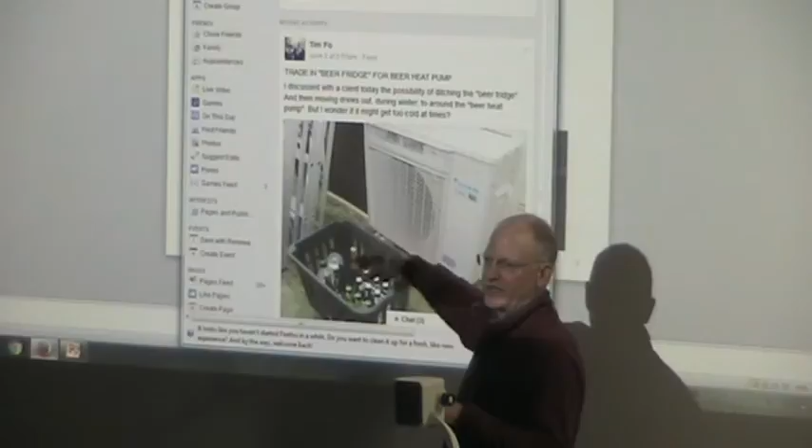Thanks folks for coming along on this cold night. When you get home this evening, how many will be heating their house with a heat pump? So there's a few. So a few of you know how it works already. But I do want to investigate if we think this is a good way for keeping the beer cold. I think it's going to work. If you've got a heat pump and you've been using it for heating, you walk outside, you'll feel the air coming out of this thing is frickin' freezing because that's how it works. It's sucking heat out of the air around it. And so the air that ends up coming out of here is very, very cold.

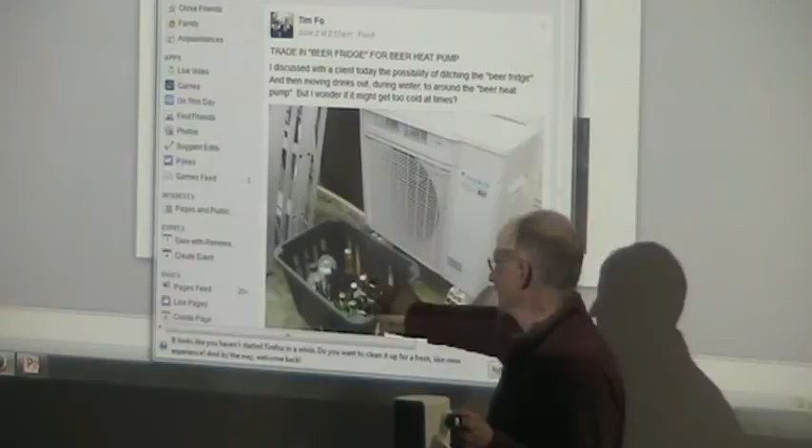So I do a lot of consultation with people in their homes about how they can save energy. And often you'll find people have a beer fridge, and so you encourage them to shut down the beer fridge. And in fact, here what we have here is a beer heat pump. So in the wintertime, you could go put your beer out there. But actually, it might even freeze if it gets cold enough. I think that's possible. As long as you got honest neighbours. And honest neighbours, that's right.

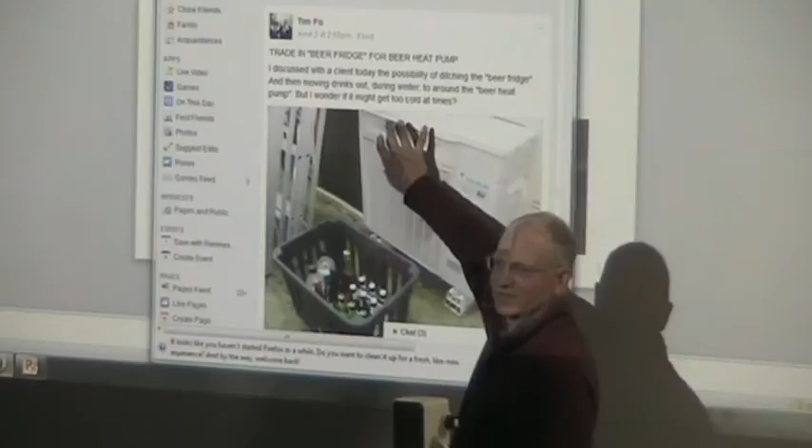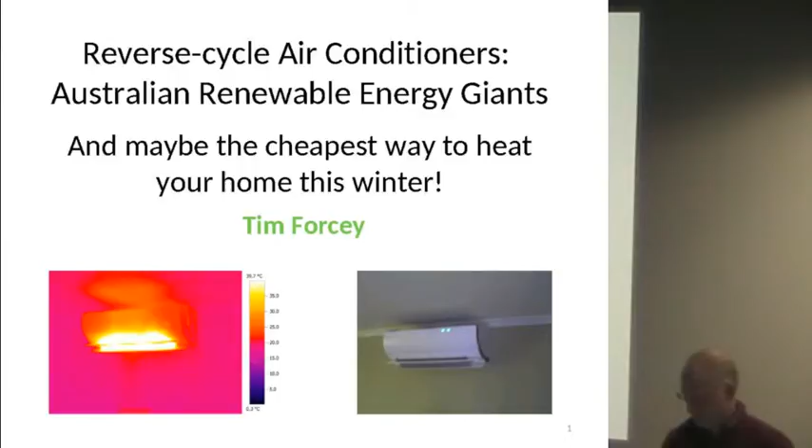All right, here's tonight's presentation. Reverse cycle air conditioners, Australian renewable energy giants. Actually, this presentation is already on the internet. BZE, Jody loaded it up with BZE Energy Freedom some time ago, most of it. And in fact, if you Google renewable energy giants, when I do that, the number one hit is this presentation. So that's pretty cool. So just go home and Google renewable energy giants and you should be able to find it.

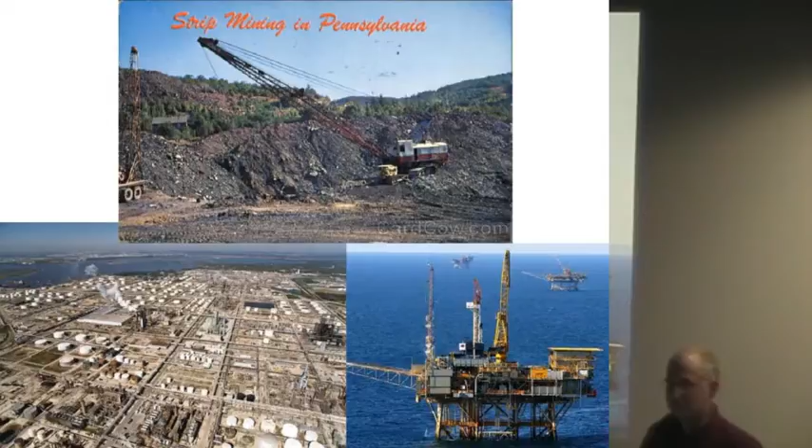A little bit about me. I grew up in the state of Pennsylvania in the States, and one of my first jobs off the dairy farm was working in the coal strip mines in Pennsylvania. So that's what I used to do. And then I trained as a chemical engineer, and I've worked with Esso and BHP. I've been offshore Bass Strait and worked in oil refineries and things, so that's the sort of thing I used to do. But then at some point I became a bit aware of the climate emergency.

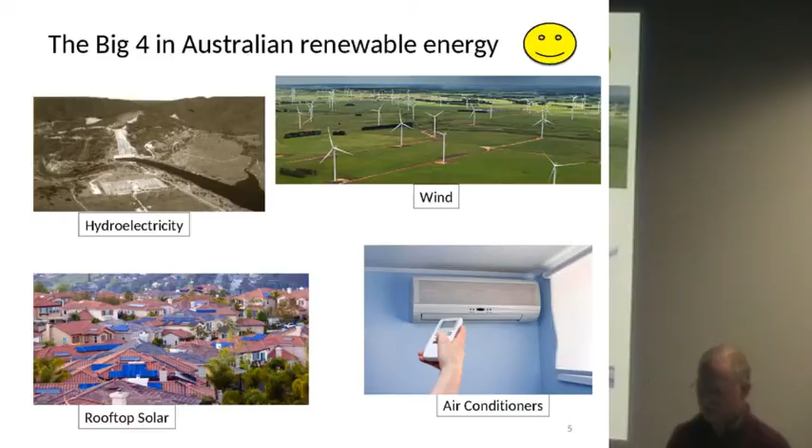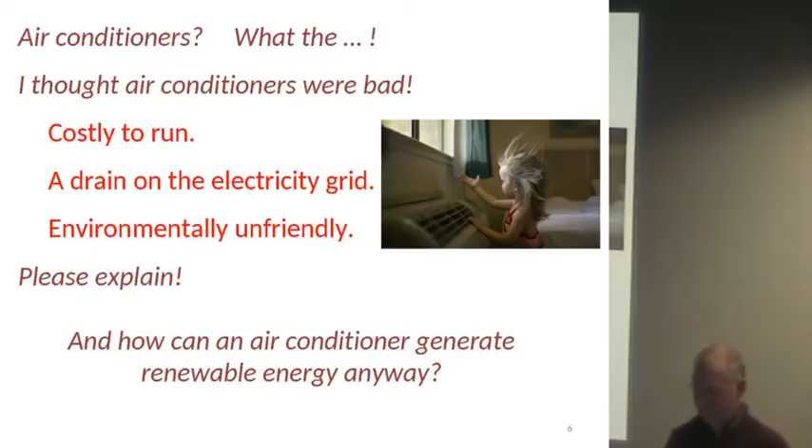Okay. Here are the big 4 in Australian renewable energy. Hydroelectricity, like the Snowy scheme, wind, rooftop solar, and air conditioners. Air conditioners? What the heck? I thought air conditioners were bad. They use electricity in the summer. They're expensive to run. They strain the electricity grid. They're environmentally unfriendly. Air conditioners are the devil. Please explain. And how does an air conditioner generate renewable energy anyway?

Well, all those nasty things about air conditioners are true in the summer, of course. So if you're running your air conditioner a lot in the summer because your house is not a very good thermal performer, then you can run up a big electricity bill. It does strain the electricity grid. It does do all those things when you're using it in the summer.

But in the wintertime mode, which is what we're here today to talk about because we're very close to the beginning of winter, when you run your air conditioner on reverse cycle mode, you might find they are the cheapest way to heat your house. You might find that it's far cheaper to use your reverse cycle air conditioner to heat your house than to use gas. So we're encouraging people to go home and find the heat button on their remote. A lot of people don't know they've got a heat button on their air conditioner's remote control. So go home and see if you can find that and turn it on and see what happens.

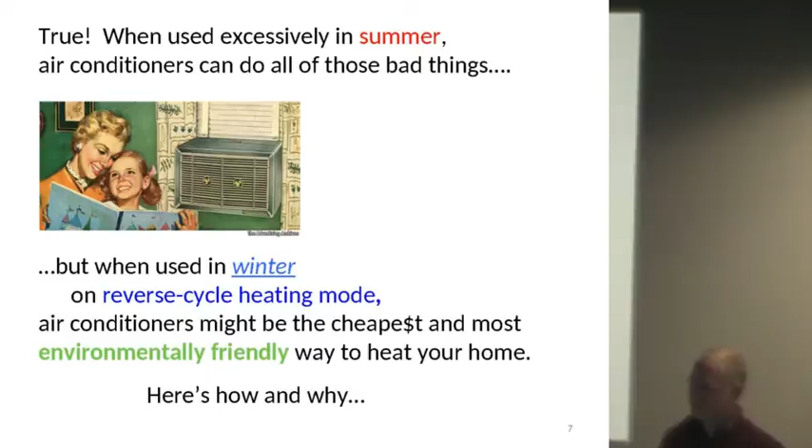But let me explain how this all works in the economics. First of all, we probably need to stop talking about them as air conditioners and really talk about them as heat pumps, because that's what they are in the wintertime. In the 1970s, we had heat pumps in America, so it's not a new technology, although the efficiencies have improved remarkably over time. So here we just see some recent quotes I've pulled from overseas, because everywhere else in the world they call them heat pumps. In America, the UK, New Zealand and Tasmania they call them heat pumps. But in mainland Australia we call them reverse cycle air conditioners.

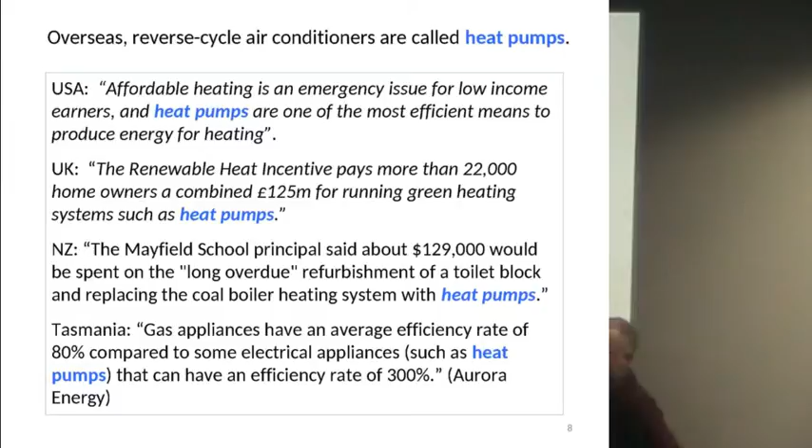I like this one from New Zealand where they spent $129,000 to refurbish the toilet block and to replace the coal boiler system with a heat pump. Now, I don't know how much they spent on the toilet block and how much they spent on the coal boiler.

Here's how a heat pump works. This is a discussion group, maybe a bit more technical than some audiences, so we could go through it. And of course there are the 4 major pieces of equipment that you have in a refrigerant cycle, because basically a heat pump is just a refrigerator.

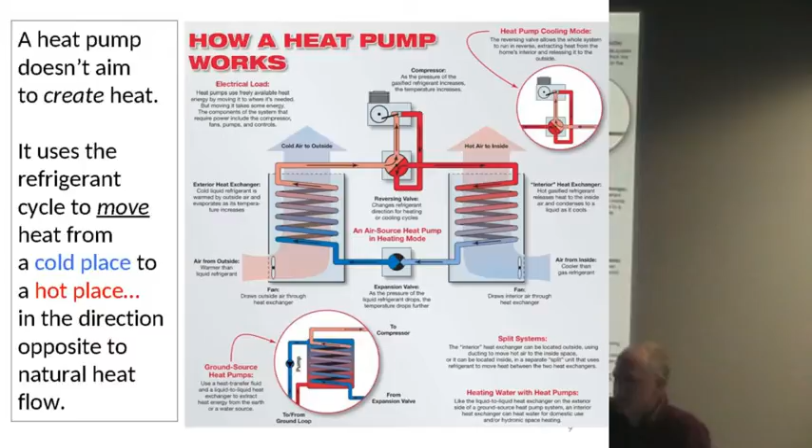You've got your compressor, you've got your 2 heat exchangers, and you've got your expansion valve. And so the refrigerant goes around and round and round, driven by the compressor from hot to cold to hot to cold. And basically a refrigerant cycle, a heat pump like that, shifts heat. It doesn't so much generate heat as it shifts it from one place to another.

And so we've got heat pumps all around us in the form of refrigerators. Refrigerators shift heat. They shift heat out of your food into your kitchen. Your kitchen might be 30 degrees on a summer day, but somehow it is able to shift heat out of the fridge, even though the fridge might be 4 degrees. Your freezer is even colder. It shifts the heat out of the fridge into your kitchen by using the refrigerant cycle.

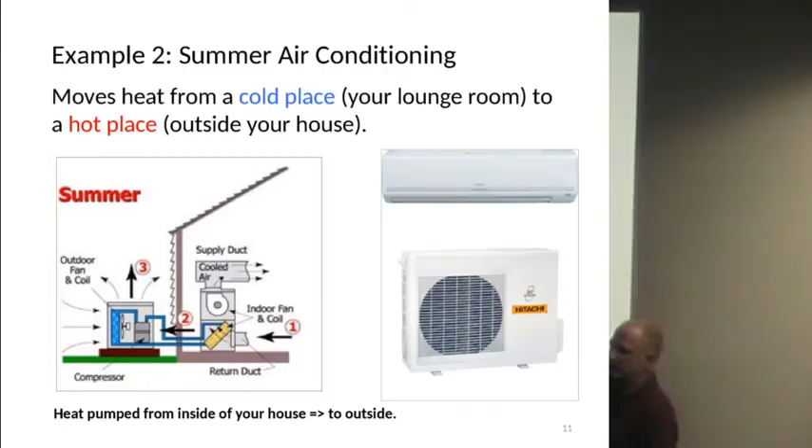Same thing occurs in the summertime when we're using an air conditioner. We shift heat from the lounge room outside. And so if you go outside in the summertime around this thing, it'll be hot. And you can basically feel the heat that's being shifted from your lounge room and being rejected outside. Even if your lounge room is 25 degrees and outside is 45, this thing still operates and it shifts heat from the lounge room outside.

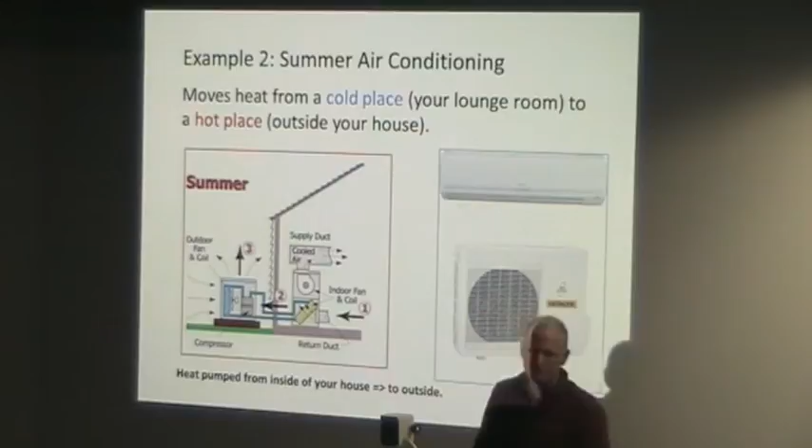Now some bright spark looked at this one day and said, I wonder if we can turn this around and get it to work the other way. During the wintertime, instead of shifting heat from here to here, then we shift heat from here to here. And that's the reverse cycle air conditioner, shown here.

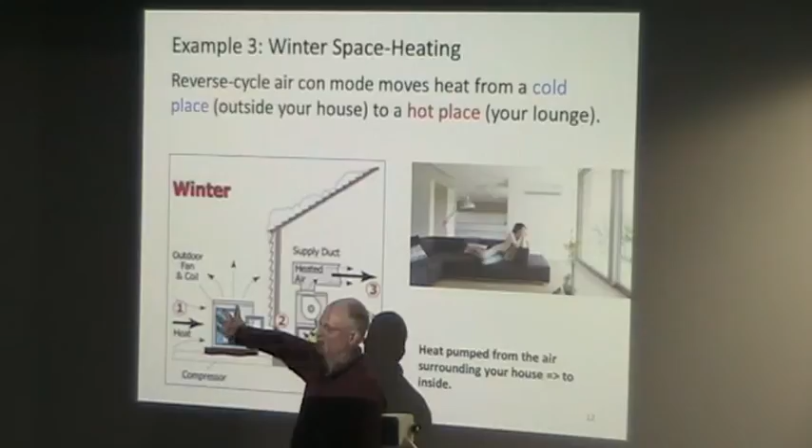So what it does now, when you turn it around the other way, is it's able to capture free, renewable ambient heat, basically another form of solar energy, because the air outside is warm only because of the sun. And so it's able to grab that heat, pump it up to the temperatures you need with the refrigerant cycle, and bring it inside. So these things work down to 0 degrees, down to minus 10 degrees. That's the heat pump for heating the home.

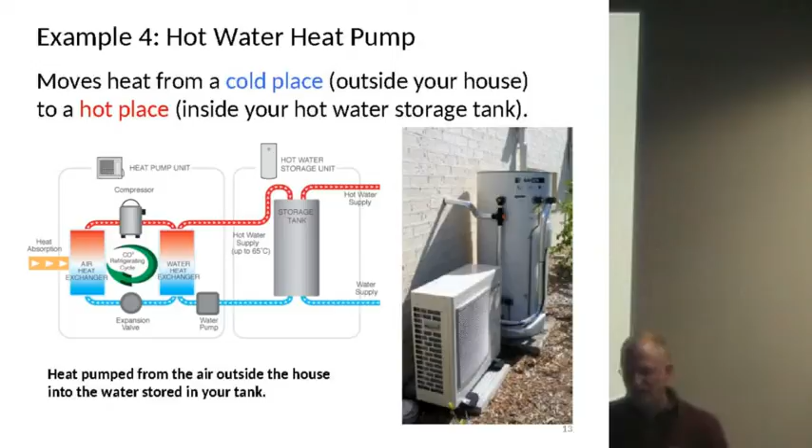And also these things can be done at a very large scale for industrial purposes. So for providing heat for dairies, for food processing, there are limits as to the temperatures that they can get to. They can't get to 1,000 degrees, but you can use heat pumps for a lot of those low-level energy applications. But now what about the part for renewable energy?

To stress that again, so on this unit, the hot water system, you do have to buy 1 part of electricity, but with that 1 part of electricity, you get 4.5 parts of hot water. How did that happen? Well, it was able to capture 3.5 parts of renewable ambient heat from the air outside this unit and to put that into your hot water.

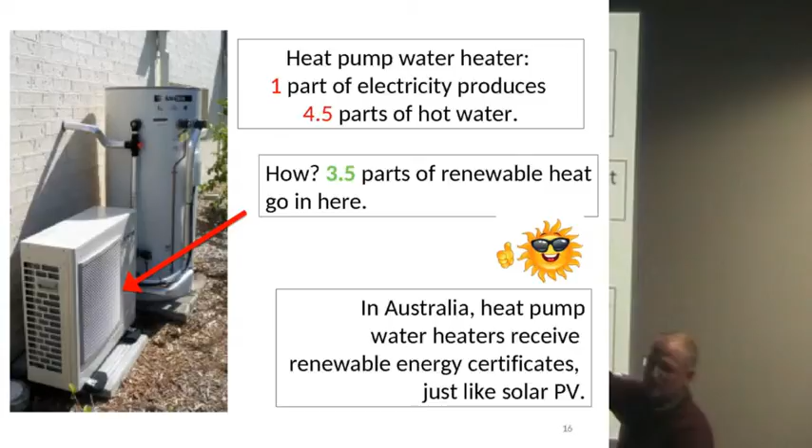So these things, since they're always in heating mode, they don't run in reverse, unless you want to make ice, I suppose, but they're not set up that way. But these units, if you go near them when they're operating, it is always cold around this unit because it's sucking heat out of the air and putting that in your hot water tank.

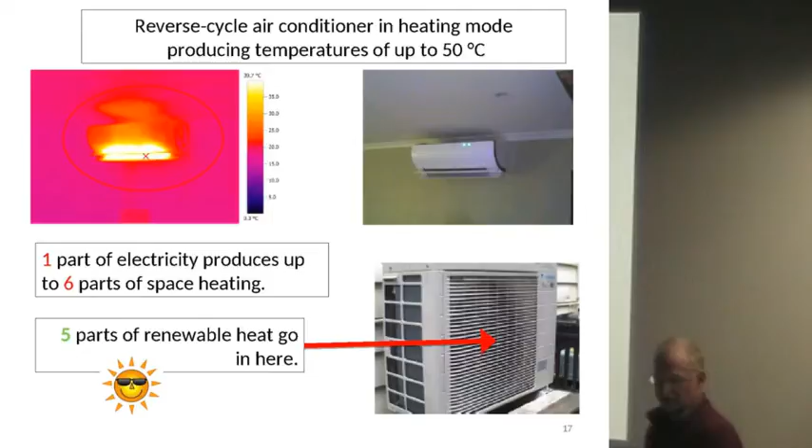Same thing for the space heating. So here we have a reverse cycle air conditioner. This is a very efficient one. You buy 1 part of electricity and you get 6 parts of heat coming into the house.

It's basically 600% efficient. If you buy 1 part of gas and try to heat your house with it, its efficiency will be less than 100% because you burn the gas, some of the heat goes up the chimney and so forth. So this can be more than 100% efficient. In fact, it can be 600% efficient.

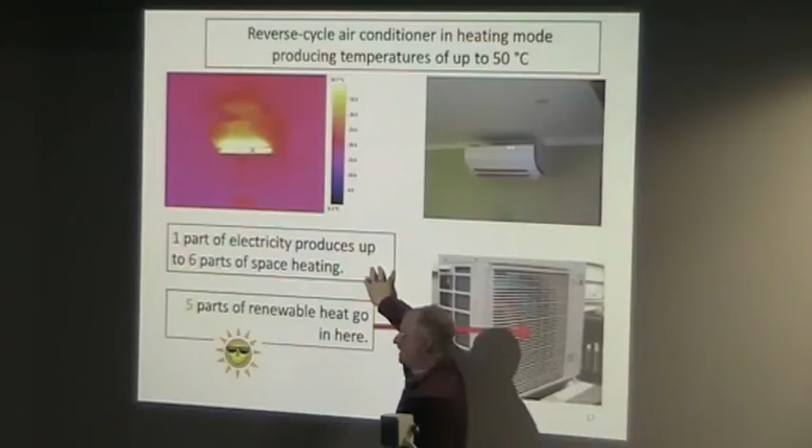And this is the amazing factor that shifts the economics and means that heat pumps can beat gas in terms of home heating economics. So you buy 1 part of electricity, get 5 free units of renewable heat. In the UK, you do get renewable energy certificates for buying a reverse cycle air conditioner or heat pump. In Australia, you don't.

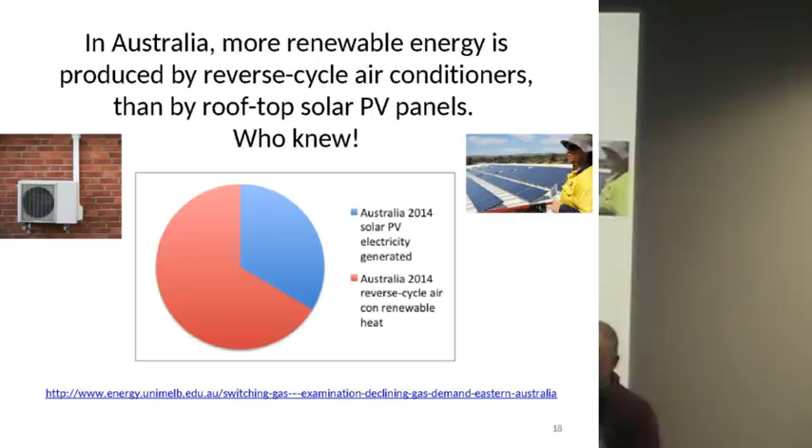At Melbourne Uni, we really based our work on work that had already been done by the ATA, the Alternative Technology Association, and then we commissioned them to do a bit more modeling because they already had all the models set up. But we were the first ones to look at ABS data and work out that, we all love rooftop solar. Rooftop solar is fantastic. Everybody's out there putting up solar panels on the roof. All those rooftop solar panels generated that much energy in 2014.

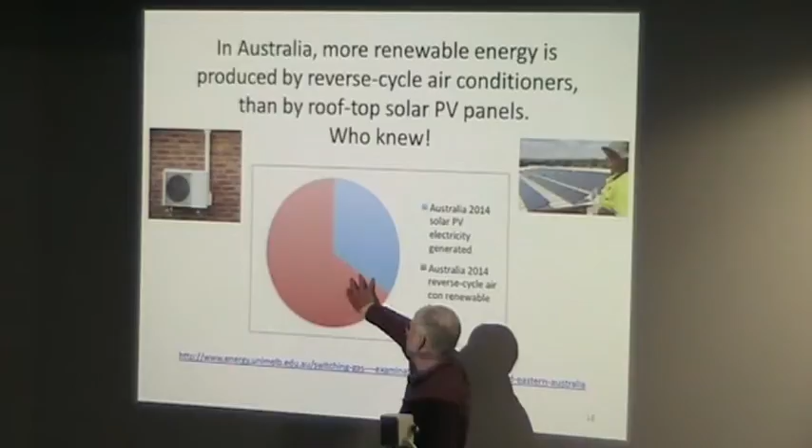We worked out that we think that people using their reverse cycle air conditioners for space heating generated or recovered that much renewable energy from the heat pumps. So when people are looking for what's a big source of renewable energy for Australia, you should not overlook the heat that's in the air and that can be recovered with the heat pumps. It's bigger than rooftop PV.

The amount of energy that we recover with rooftop solar can grow as people put more and more panels on, but the amount of energy that we recover with heat pumps can grow too, because most people in Victoria and Canberra don't realize that the reverse cycle air conditioner that they bought last summer to keep their house cold is actually the cheapest way to stay warm in the winter. And so we expect to see a lot more use of reverse cycle air conditioners for heating throughout Australia, particularly Victoria and Canberra, other places that haven't cottoned on just yet.

I mean, this is already happening in Queensland and South Australia and New South Wales to a large extent, and Tasmania. Tasmania is all over it. They've had heat pumps for years because they've been largely electricity driven down in Tasmania since the beginning, and only recently have had a gas connection. So people have been heating their homes with reverse cycle air conditioners, heat pumps in Tasmania for a long time. So it's really Victoria and Canberra that need to catch on.

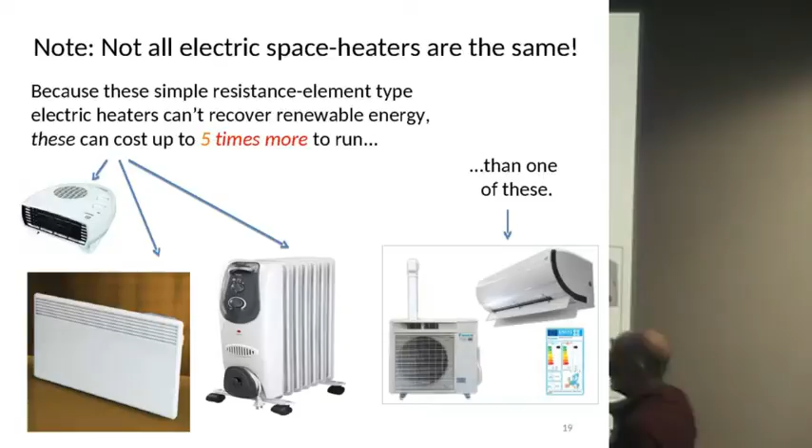So is a ducted gas system an electric heating system because you buy a bit of electricity to run the blower? No. Is this an electric heating system because you buy a bit of electricity to run the compressor? Not in my mind. It'd be more sensible if we referred to these as renewable ambient. These are electric heaters. These can't be more than 100% efficient because they're not stealing any free renewable energy from anywhere. So these can be 100% efficient, which sounds great, until you realize these can be 600% efficient.

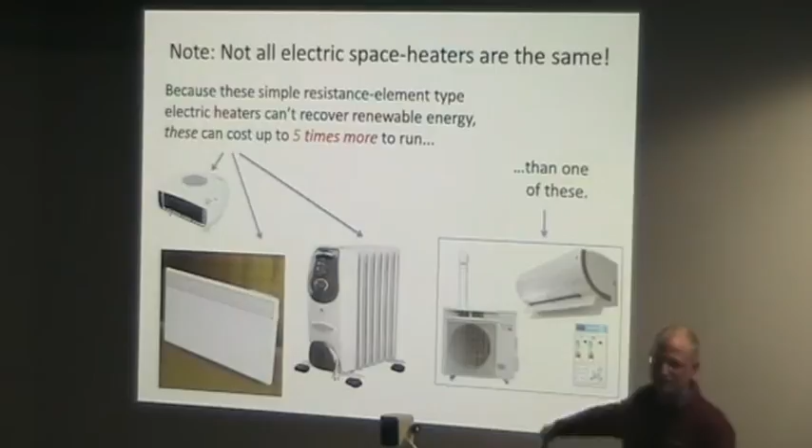With the latest and greatest reverse cycle air conditioners, first of all, they've really worked on the efficiency. In the old days, you could buy a 0-star or a 1-star or a 2-star unit, but these days you can buy a 5-star unit, a 6-star unit, you can buy a 7-star unit. And if you want to go home tonight and look at this air conditioner that you've never used for heating, and you're wondering how efficient it is, the key word will be this word inverter.

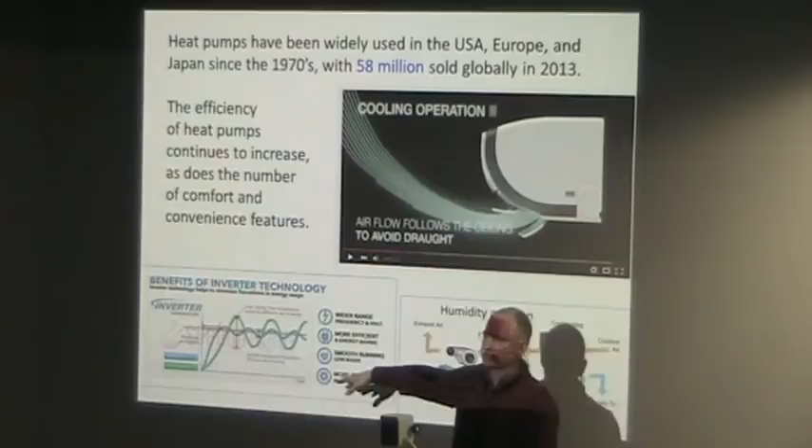So it's when they came out with this inverter technology that efficiency improved quite a lot with the reverse cycle air conditioners. And inverter means, I'm not an electronics or electrical guy, but inverter means that in the old days when you had an air conditioner, it was kind of off or on. It would come on, it would go boom, and the lights would dim in your house and probably on the whole street.

But these days with the inverter technology, it's able to modulate more like a gas pedal on a car and work out how it thinks it should be operating in an efficient way. So they use the inverter technology, and you always see it. They like to sell inverters. You'll see Panasonic inverter, Mitsubishi inverter, Daikin inverter.

So that's one thing on efficiency, but there's all sorts of bells and whistles. The amount of air filtering that you can get with these things, asthma approved, all sorts of air filtration to really improve the air quality. And then lastly, of course, you can do dehumidification with an air conditioner, but one particular unit, this Daikin unit, can actually add humidity to the air because, in addition to buying an air conditioner, you get a desiccant wheel, which sits on top of the air conditioner, and it can actually take humidity from the outside air tonight and bring it into your home.

So a lot of people don't like the dry air with heating systems, whether that's gas or using heat pumps. And so they've thought about all these problems that people don't like, and they're like, how do we make the air nicer for people? Okay, we'll put a desiccant wheel on. And so now, rather than hot, dry air, it's more like a trip to Queensland when you turn it on. You get the humidity happening. And some people don't like the air blowing on them, so they've looked at the fluid dynamics of the Coanda effect, and they've done all these different things to try to eliminate every single problem that people have had over the years with using heat pumps for heating.

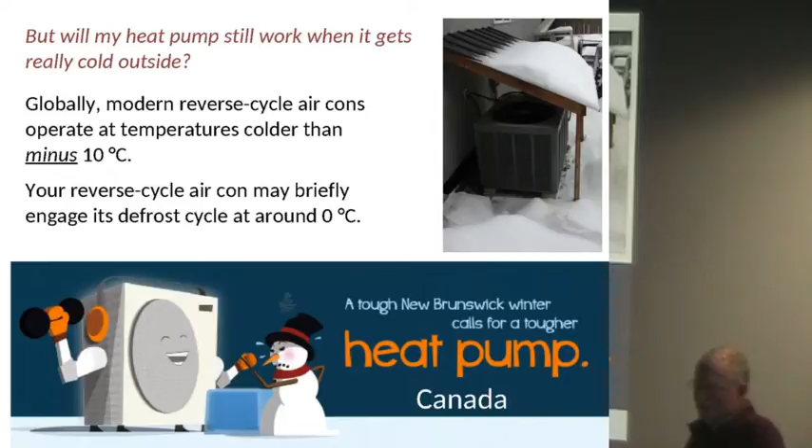Okay, so that's the renewable energy story. Heat pumps can recover up to 5 parts of renewable ambient heat, but you do have to buy that one part of electricity. And what if that comes from brown coal in Victoria? Well, if you don't want to use brown coal electricity, then of course you can buy 100% green power, which will cost you an extra 6 cents a kilowatt hour. Possibly you could be using your own solar energy for driving your own heat pump. But yeah, there is that component of the operation.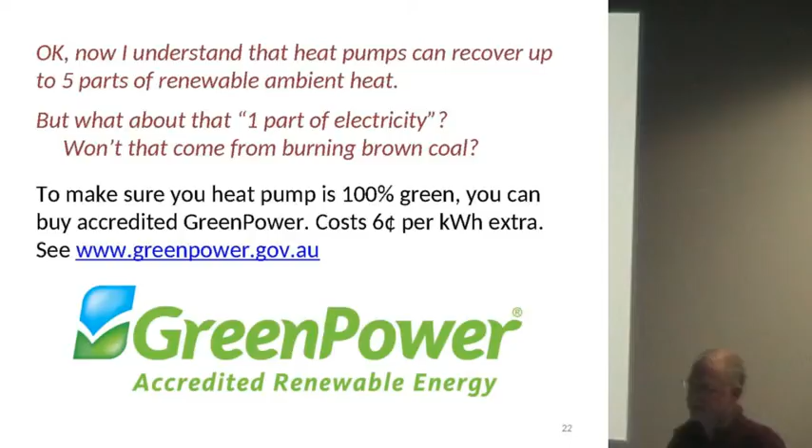But same with gas. You may find on a ducted gas heating system that there's a blower that uses 300 watts, so that's a fair bit of energy used just for a blower for a gas heating system. Give me 300 watts in my heat pump, buddy, and I can produce a lot of heat. All right, now I want to say a few words about gas.

So the whole idea of, is gas a good thing or is gas a bad thing? Is gas an economic thing or not? One needs to think about the environmental issues associated with gas. A lot of folks have concerns with coal, and so they think, well, maybe gas is greener, I'll try gas. But the problem with gas is if you leak more than about 3% of the gas from the beginning to the end, from where you get it out of the ground, process it, put it in pipelines, distribute it to the community, and it's used in people's houses, if you leak more than 3%, because methane is such a powerful greenhouse gas, nearly 100 times more powerful than carbon dioxide on a 20-year basis, you'll be worse than coal.

So the gas and oil companies really need to be careful that they're not leaking much gas, and the gas distributors need to be careful they're not leaking much gas. But one of the things that's happening is there's technologies becoming available where it's easier to detect gas leaks, methane leaks. Methane is a colorless, odorless gas, so it can just disappear into the atmosphere. It's lighter than air, doesn't even necessarily cause a fire hazard because it rises and disperses so quickly. And so you can just leak it and nobody really notices or cares.

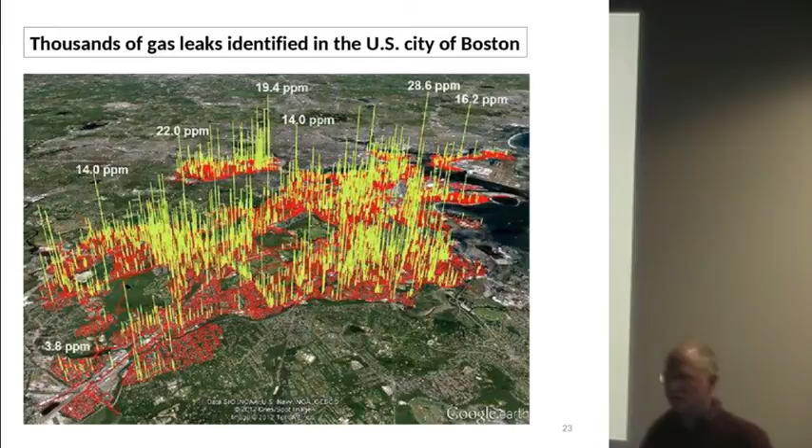But there are technologies, infrared sort of detecting technologies available now for looking at gas. And so someone drove around the streets of Boston, and this identified something like 3,800 leaks in the Boston gas system. So that's the gas just leaking off to the atmosphere and contributing to the greenhouse problem. Our street in Sandringham, you used to be able to smell gas all the time. Okay, they recently came and put the plastic pipes in rather than the corroded metal ones to try and get on top of that.

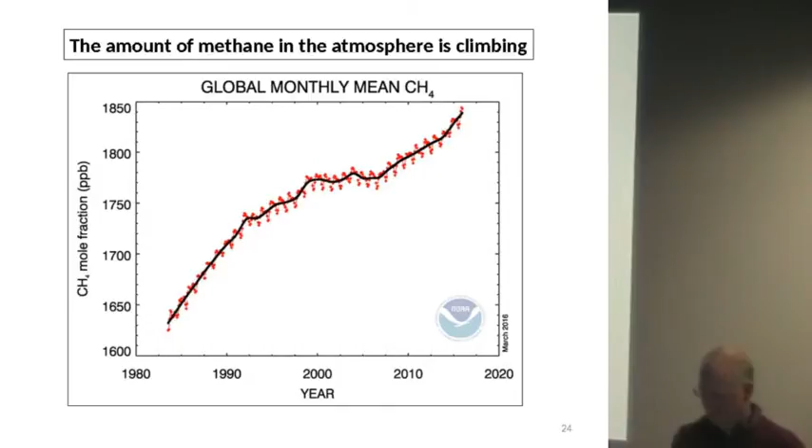Methane is going up in the atmosphere, the concentration of methane. We focus a lot on carbon dioxide. Carbon dioxide went over 400 parts per million down at Cape Grim, Tasmania recently. But methane likewise is going up. Partly due to agriculture, partly due to methane out of coal mines, but also partly due to methane that's being lost by the oil and gas industry. So methane's out of control in the atmosphere.

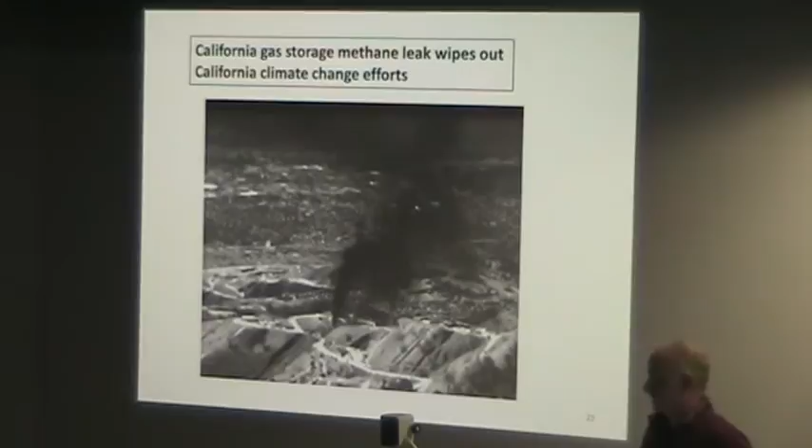Unfortunate. People had to evacuate. Thousands of people had to evacuate their homes because in addition to the colorless, odorless methane, there were also some other contaminants like sulfur compounds there, and people were getting ill and had to be evacuated. So the company there is up for billions of dollars of all sorts of claims.

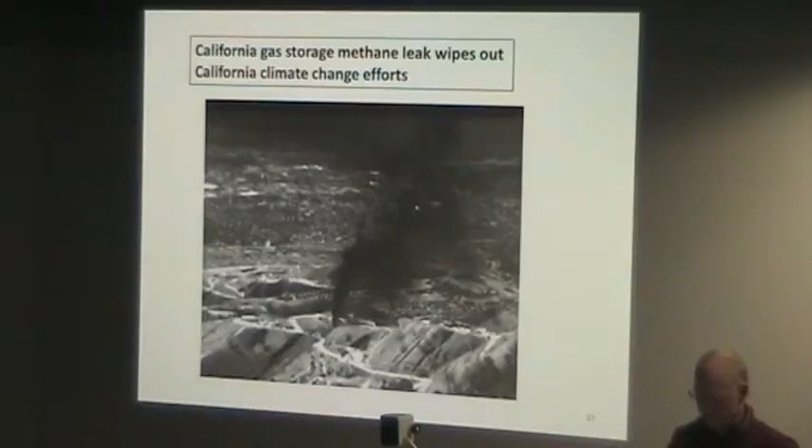And now these days we've got the unconventional gas. So in the old days, it used to be pretty easy. You'd go out to the Bass Strait and you'd be looking for oil, and you'd find there was some gas with it, and so there was a bit of a byproduct. You produced the oil. The government didn't let you just flare or release the gas from the Bass Strait, so that was a good decision a long time ago by the stakeholders. And so that gas was saved, and now we're still using it today for industry and for homes in Victoria.

So it used to be, as I say, a relatively easy thing from the point of view that you could drill one well in the Bass Strait, and you could take a handful of wells, and that could run Melbourne on a winter's night. Just 24 wells could keep Melbourne going on a winter's night.

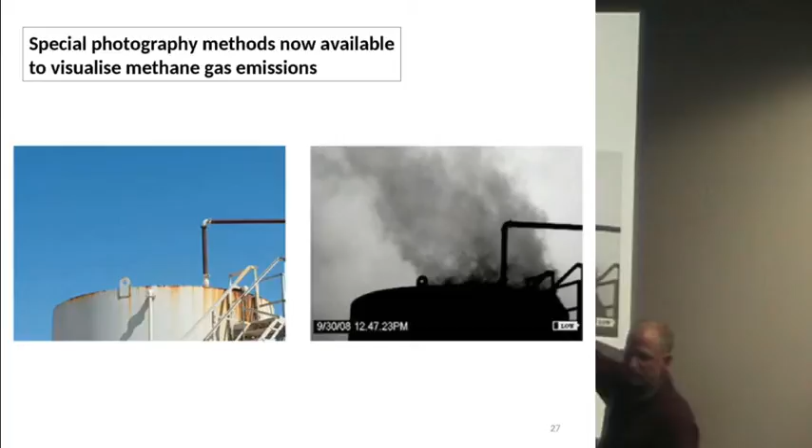Another thing that occurs is that stuff comes out of the ground, it's gas, it's water, it's oil, and you need to separate it. And you might not have the infrastructure or the interest in recovering all of the gas, and so you might just let it disappear into the atmosphere, and that's called weathering off, if you want to weather off some oil you've taken out of the ground. And so again, using special infrared cameras, you can detect now the gas that's being released from this storage tank in America.

So that's some of the issues with gas, and so that's why it's really interesting to see if there's other ways that we can heat our homes. And if it turns out that it's actually cheaper to do that, well, then it becomes really hard to come up with reasons to use gas in your home. And like I'm saying, when you use gas in your home, you might operate your whole gas heating system with an efficiency of only 50%. You burn it, a lot of the heat goes up the chimney to begin with. So in my view, we're kind of wasting that gas, particularly if there's other ways to heat your home. If industry is interested in using gas, well, if we used or wasted less in our homes, then that would make more available for industry.

The price of gas is going up because it didn't used to be possible to export gas from Eastern Australia to overseas customers. They would liquefy gas in Western Australia and the Northern Territory and put that on boats and send that to overseas customers. That's been going on for quite some time, but it was never done in Eastern Australia. It was the sort of thing that Esso and BHP would look at from time to time, but it was never economic to do so. But with the coal seam gas up in Queensland, it was found that the way to make money out of that, or attempt to make money, was to build a facility. So like $60 billion worth of gas plants have been built in Gladstone, Queensland, to liquefy gas so it can be put on boats and sent to overseas customers. So that is now occurring.

This is an article that was actually up in the Age when we released our research, which was at the end of last winter. And unfortunately, it was the end of last winter, and so that's why I decided I should get out talking to people at the beginning of this winter. They'd be more interested. But even back then, the Age ran this article and picked up the one number that an average large Melbourne home could potentially save $658 a year by using reverse cycle air conditioners for heating their home. Reverse cycle air conditioners they may well already have in their house.

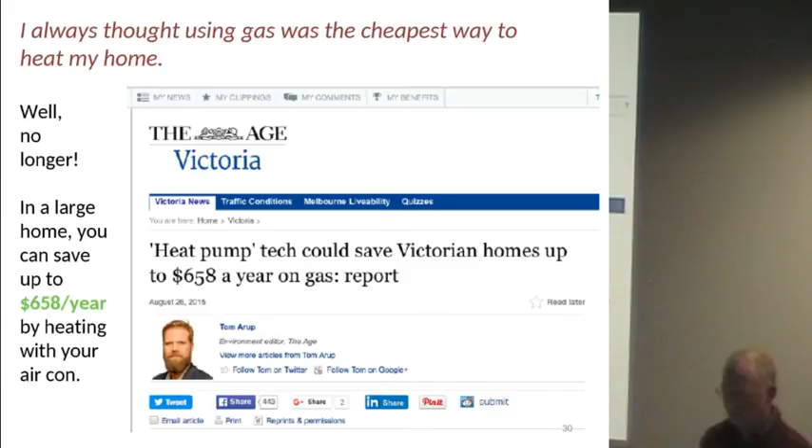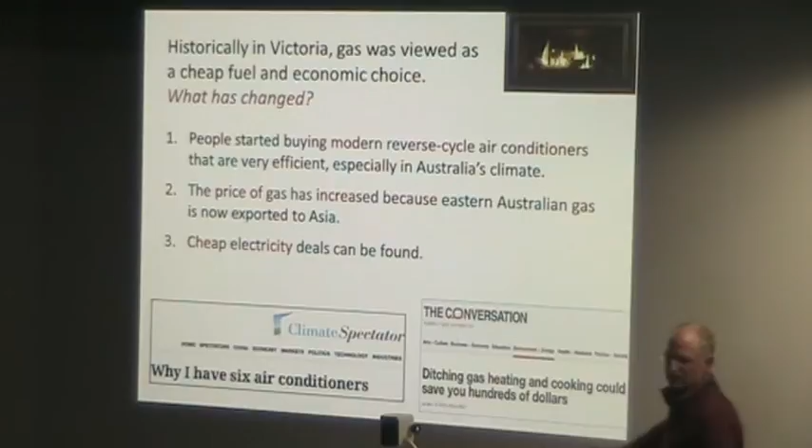So what has changed in the economics is that now we have these very efficient air conditioners, the price of gas is going up, and you can find some cheap electricity deals. So when you add all those things up, it's making a bit of a no-brainer in a number of cases to heat your house with a heat pump. And some people even have 6 air conditioners in a house that they're all using for heating right now, not necessarily unusual. And even the Grattan Institute picked up on this message.

The prize is very large in Victoria, and we presented to the state government and other stakeholders about this. There's probably about 500,000 Victorian homes, this is an estimate, that have reverse cycle air conditioning but have never used them for heating. So I guess I could ask the audience here, who's got a reverse cycle air conditioner but has never really used it much for heating? Anyone? Just one? So you're one of that 500,000. And so if these Victorians were to learn that it was cheaper to use the heat pumps, the potential savings there is about $250 million a year. So this is like the biggest consumer win ever.

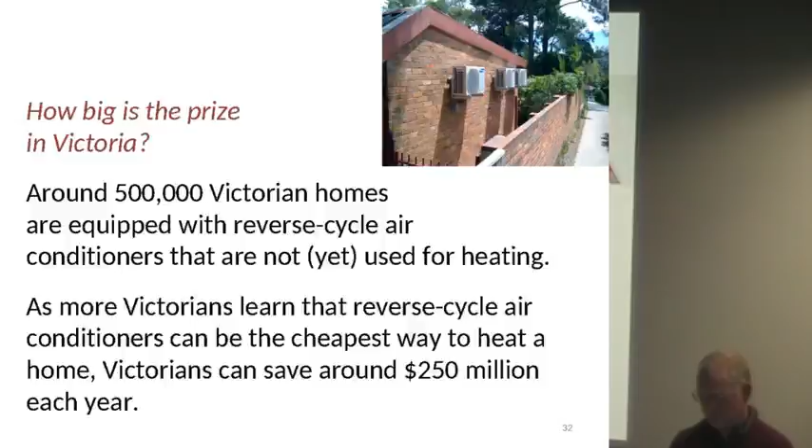But it does depend. So I've been in about 400 homes in Victoria helping people to save energy, improve the comfort of their home, reduce their footprint. And I can't stand here if someone asks a question and guarantee, yes, it will be cheaper for you to use your heat pump. Because it depends. It depends on four things. What do you pay for gas? What do you pay for electricity? How efficient or otherwise is your reverse cycle air conditioner? And how efficient is your gas heating system? But you can multiply those four numbers together. And I probably shouldn't have done this in this presentation, but I've done it on the board there, and you can work out which is cheaper.

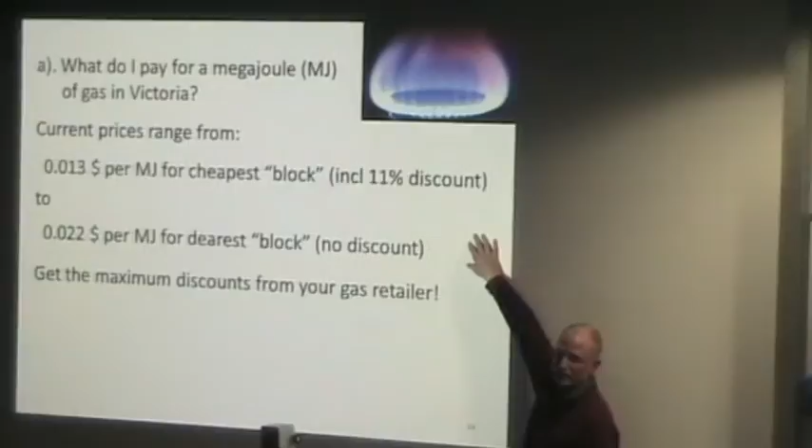So, what do you pay for gas? Gas prices vary, so have a look at your bill. First off, ring up your gas supplier and get the maximum discounts. There's discounts of 25% available now. People say, how do I get them? I say, you ring up, you threaten to switch, you do whatever, you get the 25% discount. And you'll find on your gas bill there's different blocks. They'll charge you less if you use more. So the more gas you use, the cheaper the blocks of gas become. So it's a little bit complicated on your bill.

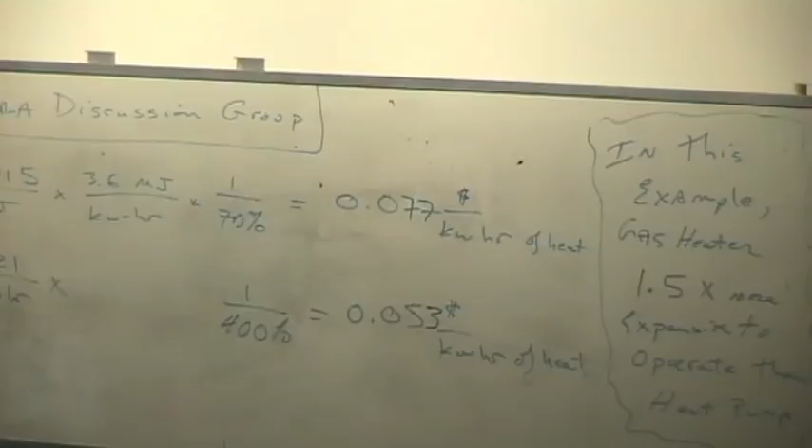You can work it out, and it might range from 1.3 cents per megajoule to 2.2 cents per megajoule. And golly gee, in Canberra, this can get up to 3.8 cents per megajoule. So they pay heaps for gas in Canberra, and folks there really need to start turning on their air conditioners. But anyway, so that's how to work out how much you're paying for gas.

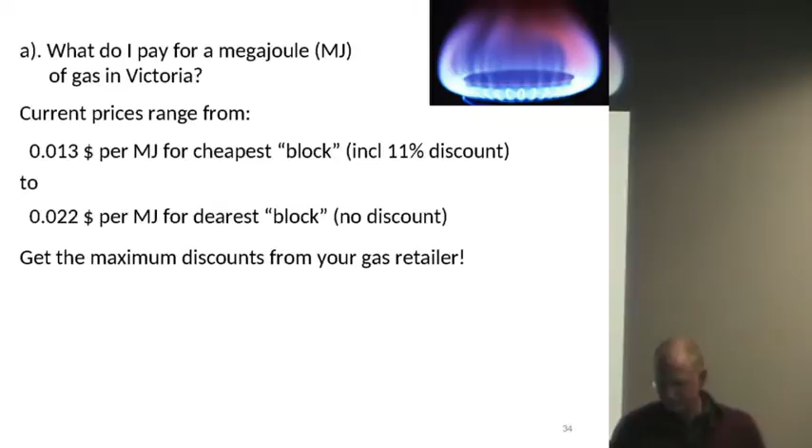Electricity has an even broader range of prices. If you're not getting any discounts, you might pay 38 cents per kilowatt hour at home right now, because this is peak time, if you're on a peak off-peak plan. Again, get the discounts. There are discounts of 34% available, particularly from PowerShop, but from AGL and others you can get 30% discounts on your electricity, so make sure you get your discounts. But I've been in a lot of people's homes where they're getting no discounts. They don't know. The state government is a bit disgusted with it, but that's the market that we live in here.

So get the discounts, but you could be paying that much for electricity, or you could be paying as little as 5 cents. If you've got your own solar system, and you're not getting paid much for putting it out onto the grid anymore because you've got a low feed-in tariff, you might be getting only 5 cents a kilowatt hour. So why would you basically give that electricity away for 5 cents a kilowatt hour when maybe you could use it in your own home with a heat pump to heat your house and stay warm? So this is a broad range of electricity prices to be considered, and it's even a little bit broader.

I've got solar panels at home, but on a good feed-in tariff is 66 cents. So I don't heat my home with my air conditioner when the sun's out, because it would be costing me 66 cents to run my air conditioner. Fortunately, our home has northern exposure and double-glazed windows and stuff. We don't actually need to turn the heat on when the sun's out. But there's the whole range of economics that you could think about if you really want to work it out in great detail.

And then how effective is your reverse cycle air conditioner? If you've got an old 15-year-old unit, it might only be 200% efficient, so it might have no stars. But these days you can get a 7-star unit that's up to like 600% efficient. So again, a broad range there of possibilities.

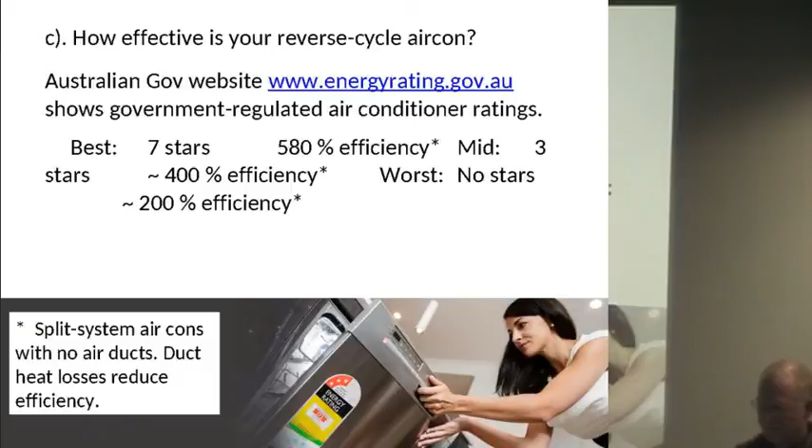Now the gas systems also have a star rating, but this is something that's managed by the gas industry. The government's not actually involved with that. But if you are in the market for a gas appliance, certainly get one with a very high star rating. But when you think about ducted gas systems, which a lot of Victorians have, the efficiency of those could be less than 40%. And this is a message that Beyond Zero Emissions has been talking about for a real long time.

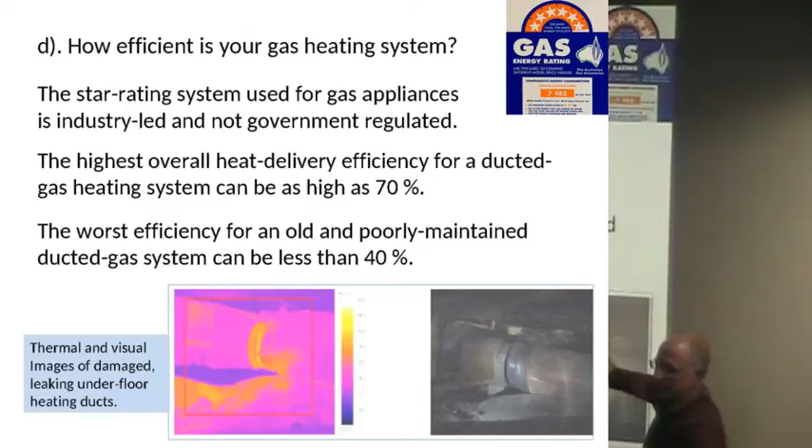And so ducted gas systems can be very inefficient. You burn the gas, a lot of heat goes up the chimney, and then the warmed air comes into the ducts. And this shows an infrared thermal image and a visual image of some ducts under a client's house. And here we found that the ducts were just split, so they were just having warm air come out underneath the house. And it turns out that this has probably been going on for 20 years. So for 20 years, that's been the efficiency of their gas system.

So I've got a system like that; the ducted heating in our house is 20 years old. The house is really low to the ground. The dog's been under the house, the electrician's been under the house. Lots of things have been under the house, and I don't really know the condition of the ducts. They're not really inspectable unless I do some excavations. We did do a renovation one time, and we found some holes in the duct. So I might judge that the efficiency of my particular unit is not that high, but it's probably not a lot different than a lot of other people's ducted systems.

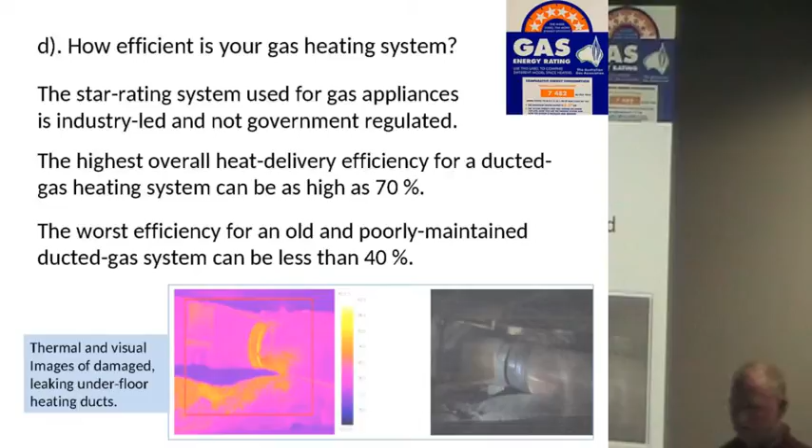So we could create a spreadsheet here and we could multiply these numbers together. And I reckon that somebody needs to build the heat calculator and load it up to a website, but that hasn't occurred yet. But it would be handy to be able to offer consumers a way to analyze the situation. The Victorian government's had a stab at it.

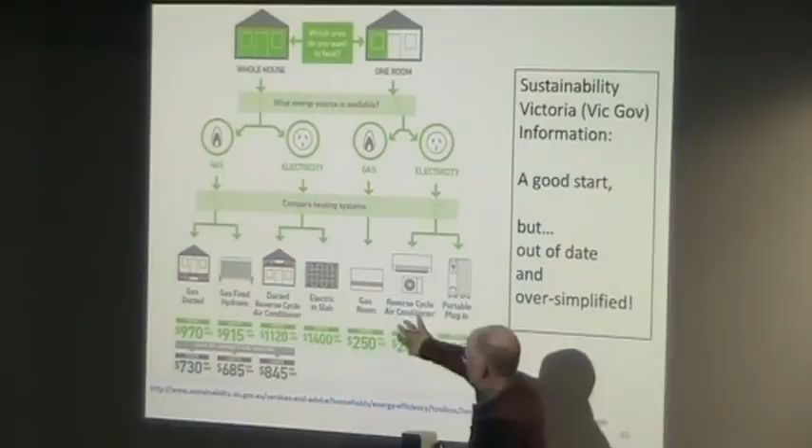So if you Google what's the cheapest way for me to heat my house, you get this sort of information from the Victorian government, and there's a whole bunch of different options. And this doesn't even talk about the differences in efficiencies of different units that you can buy, and it doesn't talk about different gas and electricity prices. So the government's had a bit of a stab at it, but what they've got here on the websites is way out of date.

We've met with Sustainability Victoria about it, and they don't even have the budget to pull this down. So here's invalid, out-of-date information for consumers, and it's also oversimplified, unfortunately. And they actually have 2 pages you can go to, and they give you different answers. So that's the state of the situation with the Victorian government's information.

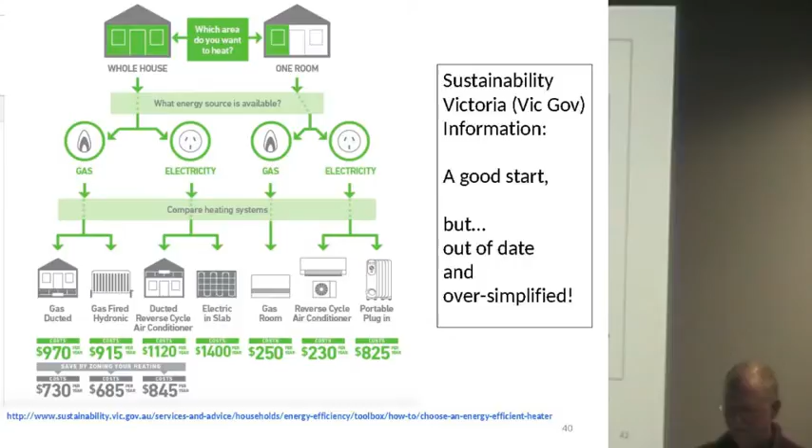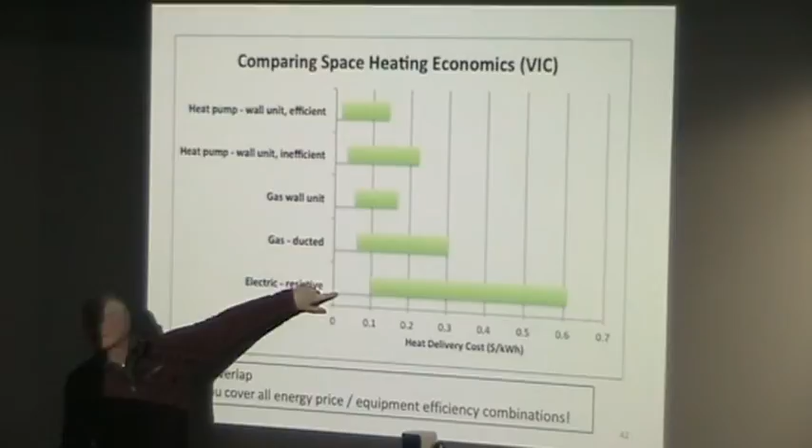But you can see, I do have a 7-star air heat pump, which is very efficient, and I've got a good deal on electricity from Power Shop. And so, say on a weekend, I could be paying this for my heating, something like that. 0.02, I think it is on my spreadsheet. That's how cheap the heating is in my house.

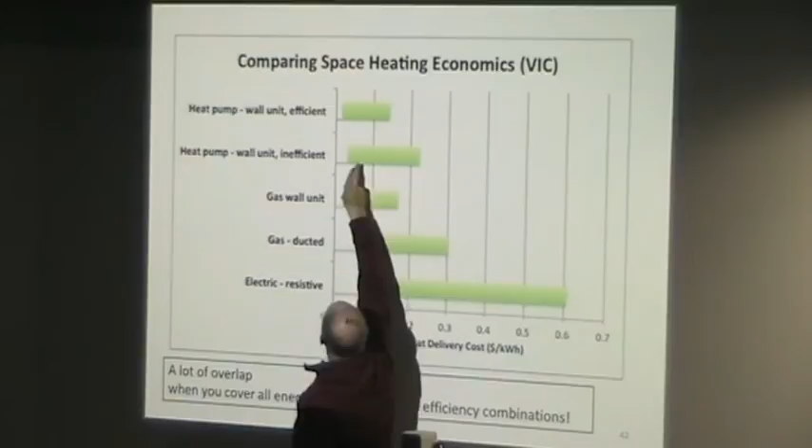But there is a range, and so this is the challenge, trying to express to consumers, what's the answer for you? Is it here, comparing with this, or this? You're comparing that with this, and obviously electricity for the heat pump is a big winner. But if you're comparing that with that, well then maybe gas is most economic.

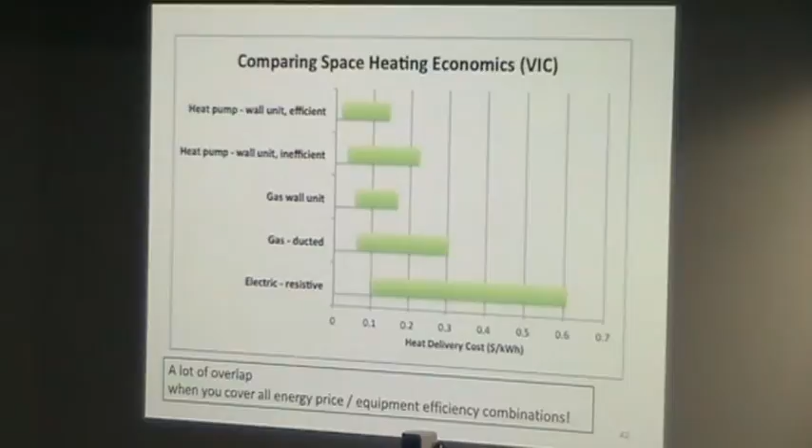This is the calculation, pretty simple of course. A gas price and electricity price. The gas is in terms of megajoules, so you've got to convert that to kilowatt hours. You stick in whatever efficiencies you think you've got, and you might come up with something like this. And in this particular example, the gas heater is 1.5 times as expensive as the heat pump.

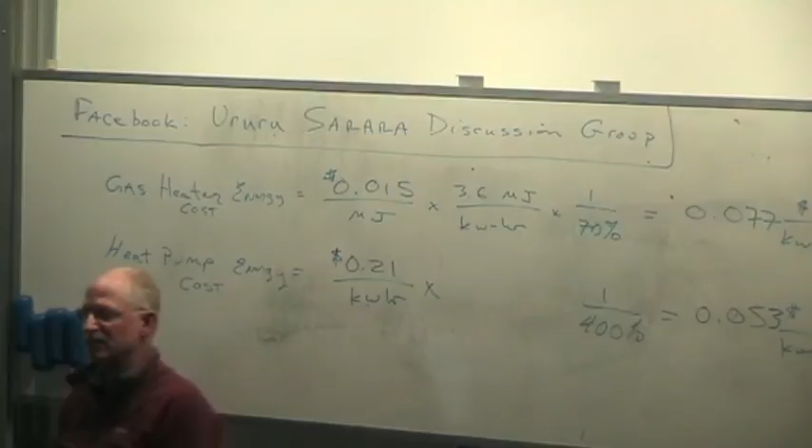And the big factor you see is, you should multiply that by that, but you'll find that on an energy basis, gas is traditionally cheaper than electricity, but it's this factor of 4 or 5 on efficiency that brings the heat pump into the picture.

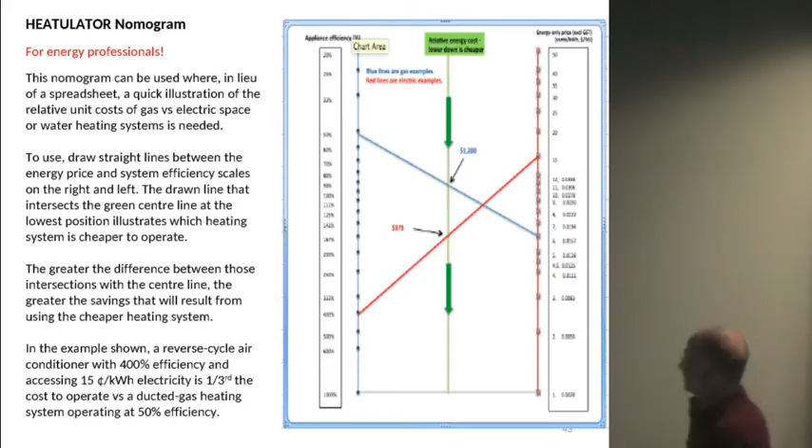I had to play around with this, and if any of you went to uni before there were calculators or computers, you'd recognize a nomogram. I think that's what it's called. And this uses logarithms, like you have on a slide rule. But it's actually kind of handy. What you do is you line up.

So the red line's electric, so you pick an electricity price, and you pick an efficiency, and you draw a line. And for the gas, which is the blue line, you pick a gas price, and you pick an efficiency, and you draw a line. Whichever one is lower is the winner. So in this particular example.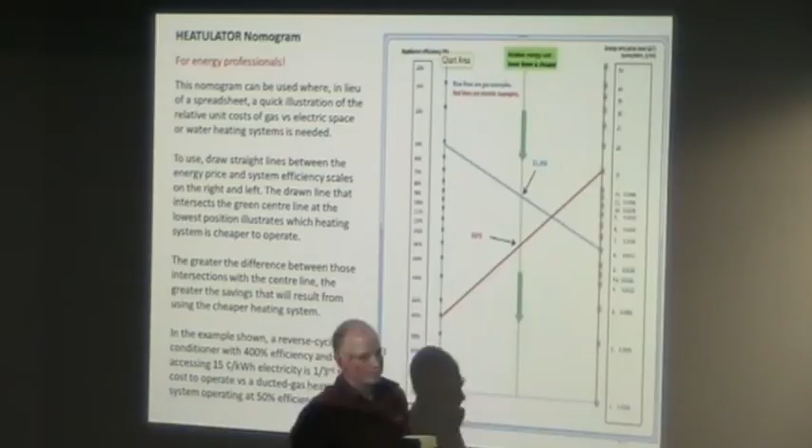And so this can be a bit handy because it shows that the heat pump is going to win, even if you get up to only 200% efficient. So if it's a 0-star unit, it can still win. Shows you maybe how that works visually. But this is too hard for a lot of consumers.

So what we also have tried to come up with here are just some case studies. We've got a few case studies in this presentation, and this is uploaded on the internet, so you don't have to read it all here. But the hope is that some consumers might be able to read through these case studies and say, yeah, that house sounds like mine. I think I'll try my heat pump.

This is the case study of Gasless Gale. Gasless Gale already had an electric cooktop, and she had gone out and bought a heat pump hot water heater, and she was asking me why she still had a gas bill. And I said, well, you're using a little bit of gas for your pilot light on your gas heating system.

And it was summertime, so she said, can we shut that off? And I said, yeah, you can shut that off. You've got to relight it later. So she said, shut that off. She said, right, now I won't get a gas bill. I'm like, well, yeah, you'll still get a gas bill.

You've got to ring up the gas company and tell them you don't want the service anymore. And I said, but are you sure you want to do that? So it turns out she had a ducted reverse cycle air conditioner system. She had used it for cooling. She hadn't found the heat button at that point on her remote control. But she was happy to give it a go.

And she said, no, I want to get rid of gas. So let's just shut that off. She rang up the gas company, no more gas bill, and the next winter she found the heat button, and it's working quite well for her. She's probably got like a 1-star unit, but we've compared her electricity bills since and her gas bills before, and I reckon she's saving, it's not a big house, she's saving a couple hundred dollars. Eventually her 16-year-old aircon will die, and she'd probably save a bit more when she improves the efficiency of it.

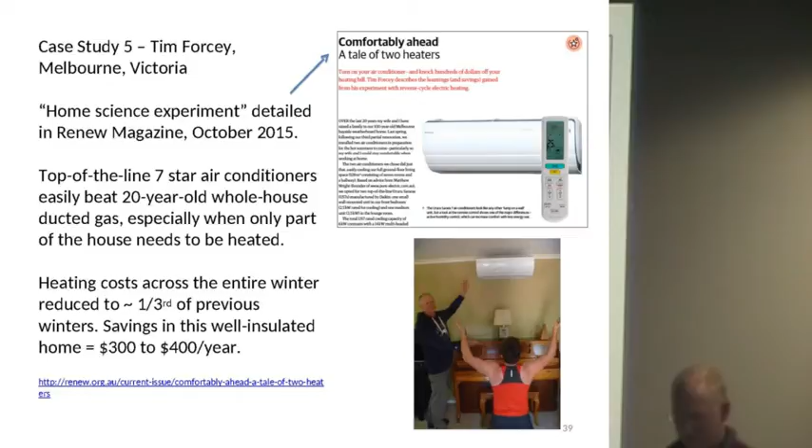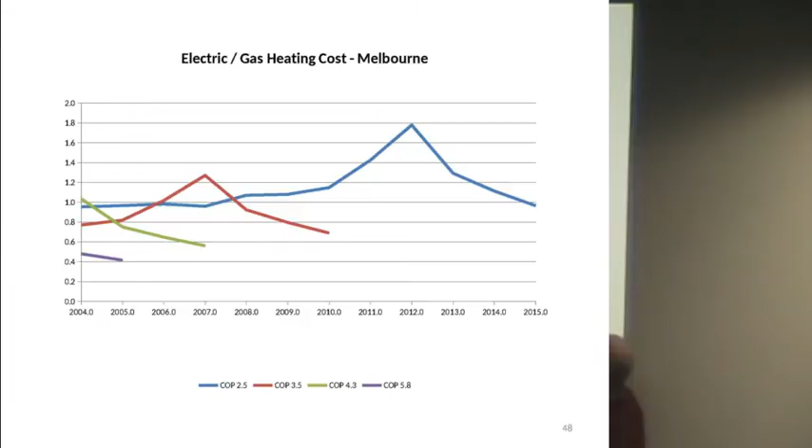But it made me think, well, this is the situation now. How long has it been this way? I've only been in this business recently. I used to do other things. BZE was onto this and calculating things quite some time ago. But I said, how long has it been this way? And it turns out, certainly the efficiency of air conditioners has improved with time. This is a very efficient one, 5.8 coefficient of performance. These are less efficient units. Probably back in 2007, this was all you could buy. And even then, it wasn't much worse than gas.

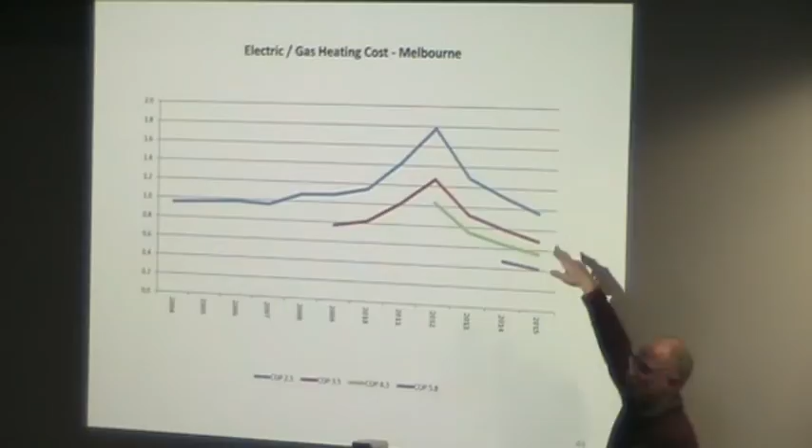But then electricity prices did shoot up, 2010 or whatever, and still people weren't thinking about it. But now electricity prices have come down again in Victoria. You can get some good deals. Meanwhile, the price of gas has gone up, and the efficiencies have improved so remarkably. So now this is why you can be on to such a winner these days with heat pumps in Victoria.

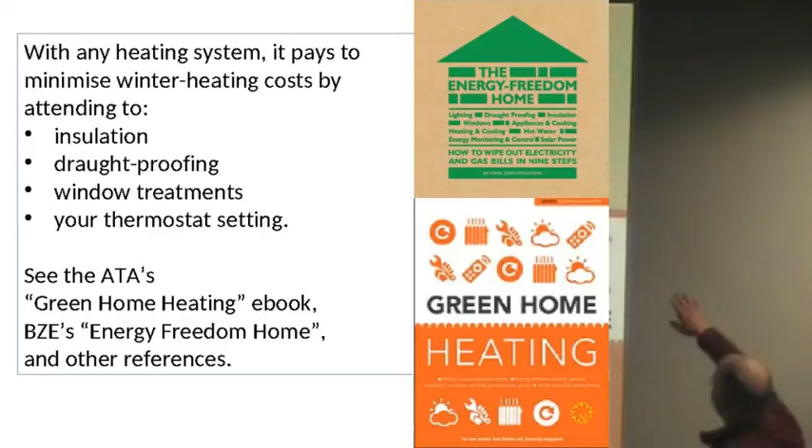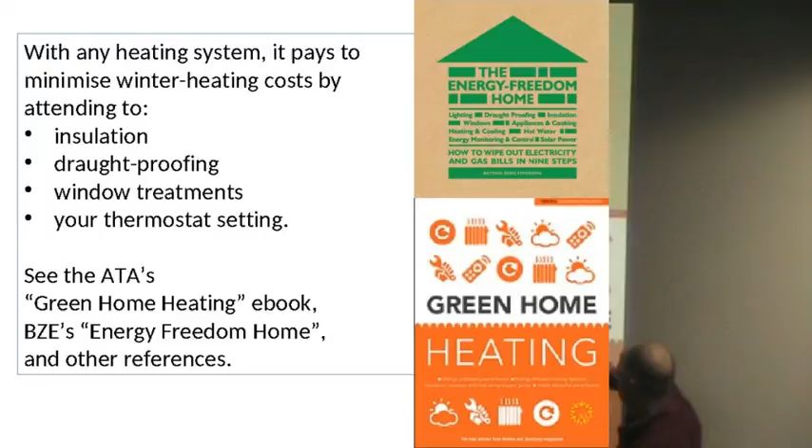There's a few references available. One you might win as part of the raffle. Part of this is Richard Keech's story of his house, which is gas-free. But also it's the whole Beyond Zero Emissions approach of the 9 steps that you can take to get your home off of gas and operating a lot more efficiently. Also the ATA has published things such as the Green Home Heating Handbook. And the ATA's got a couple of different brochures which I spread out on the seats as well that you might have collected, which are discussing this message.

There's Richard's family. So this is how to make your home completely gas-free. If you can get in the situation that you're comfortable with heat pumps for heating your spaces, heat pump for hot water heating, induction cooktop for cooking, then you don't need gas anymore. And in fact, that was what the work by the ATA found, that there is no economic reason for any new house anywhere in Australia to be connected to the gas grid.

There's no economic reason for any new suburb in Australia to be connected to the gas grid. And in terms of existing houses, well, up in New South Wales, there are hundreds of people that are leaving the gas network in New South Wales. I was at a gas conference back in March, and Jemena, who distributes the gas up there, was talking about the customers that they're losing from the gas grid up there.

People talk about coming off the electricity grid. Oh, I hate electricity companies. I'm going to buy batteries, solar. I want to come off the electricity grid. People are talking about coming off the electricity grid, but few are doing it. People aren't talking so much about coming off the gas grid, but people are doing it.

And back in January, AGL raised the fixed charges. So we still have gas to our house. And AGL raised the fixed charges by 25% in January. So that's the daily charges. And I went back in time, and they've raised the fixed charges 75% in 5 years. So AGL down here is basically chasing people off the gas grid. And so you can now spend almost $1 a day just to be connected to gas.

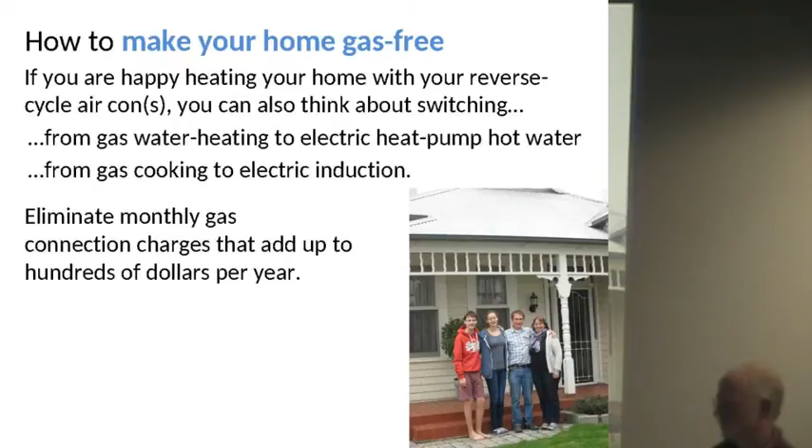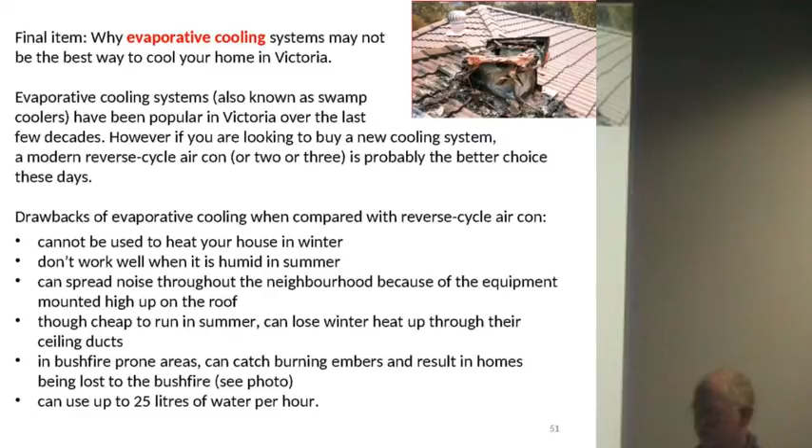One last in the presentation, it talks about evaporative cooling as well. People say, well, if I'm going to get a cooling system, should I get refrigerative, reverse cycle, or should I get an evaporative cooling system? I say, well, evaporative cooling, with that, you can't heat your house. So if you get a refrigerative reverse cycle air conditioner to cool your house, you get a free heater for the wintertime. References. Maybe you'll never think about an air conditioner the same way.

That's it. Open to discussion. We'll get questions going. I had one to start with, Tim.

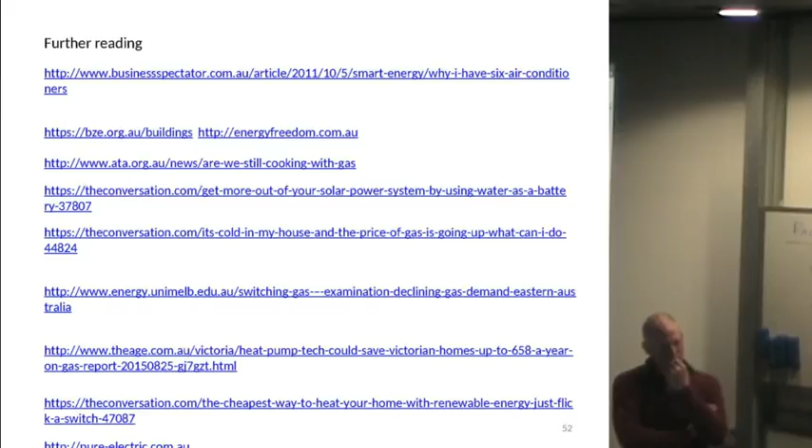Regarding the rating where you said negative 20 degrees Celsius, does that do anything for the performance of the unit? If it's colder outside, is it going to be harder for it to heat a space inside than if it's 20 degrees outside? Right. So a heat pump.

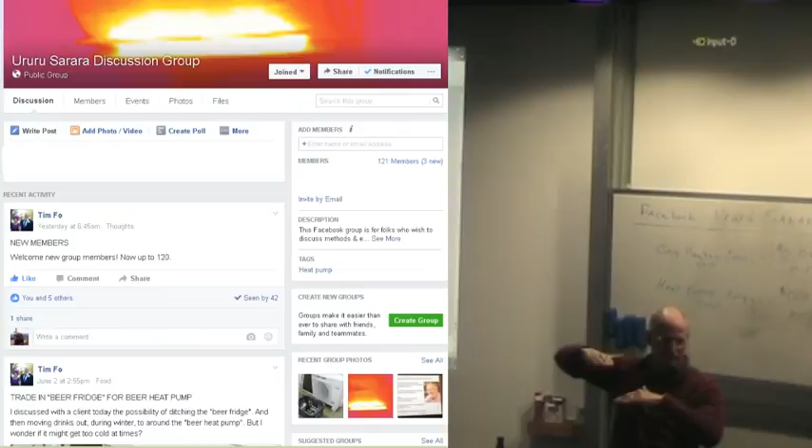The thing about a heat pump is what it does is it pumps heat. And so it's kind of like pumping water in a sense. I mean, if you go pump water this far uphill, then the pump has to work hard. If you only have to pump that far uphill, the water pump doesn't have to work as hard. Same thing with an air conditioner or a heat pump for heating your house. And again, when the government produces these star ratings, they do it at like a standard outside temperature, I think, of 7 degrees.

But say it's 15 degrees outside. It's a bit chilly, and so you want to turn on your heat pump to warm your house up just a little bit. It doesn't have to do much work, and so the efficiency there is going to be pretty high. So again, I say to folks, if you're not totally sold on this idea, well, at least try your heat pump in the autumn and in the spring, and certainly when it's not that cold outside, but you want to heat the house up a little bit, you don't need to turn on the whole gas system, possibly, depending on where your air conditioners are.

And it can work very efficiently because it doesn't have to pump that hard. It's only pumping a few degrees. Yes, as Melbourne gets down to 0 degrees, then it will have to work harder under those conditions.

What's the feasibility of converting an old gas ducted heating system, use a reverse cycle air conditioner, but use your old ductwork? Yeah. There's umpteen combinations. What I've got at home is just a split system air conditioner, a couple of them. So you've got your indoor unit and right outside the outdoor unit. And it's just connected by small diameter copper piping, which is just refrigerant going around.

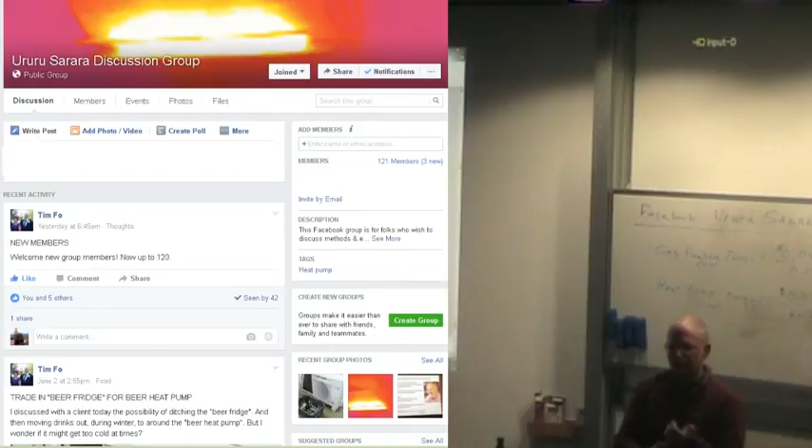But I'd say make sure your ducts are in good shape. And if you do want to buy ducts, you can buy different sorts of ducts. Some that are better insulated than others, some that are structurally stronger than others and can withstand small children and dogs and things like that. So if you're building a new property or do want to get some ducts for one reason or another, get some good ones. There's good ones and bad ones on the market. And you potentially could do a retrofit like that.

Another retrofit people are talking about is they might have a hydronic system, a gas hydronic system. So that's hot water going around the house through the radiators. Yes, you can run that off of a heat pump. So if you did want to replace gas to heat that water, you would just use a system very similar to that hot water heater I showed before that's a heat pump, and quite happily run a hydronic system with a heat pump.

And that's part of the problem, but one of the interesting things, I've been in so many houses, but they're all different, and there's just dozens and dozens of different types of heating systems that are employed in all of them. Can you tell me what size the two units you put in either end of your house are?